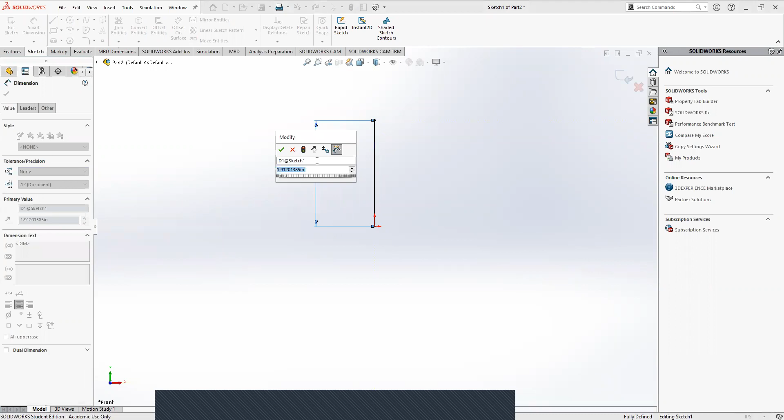I'm going to show you basically how to make a sphere first, with the revolve extrude. So what you could do is just make our line here. We can just make this like a 2-inch line. It doesn't really matter too much here because we're just making a ball. Once we do that, we'll go to our center point arc. That should be the default, unless you've changed it.

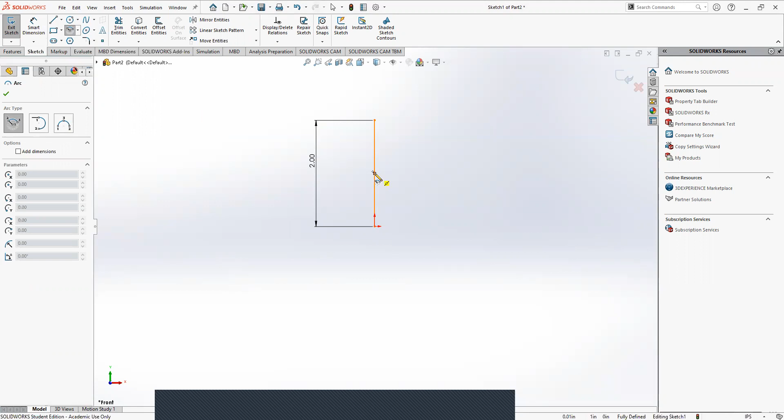But you should just go to center point arc, and then your first click is going to be the center point of it. So we're going to click on the middle point of the line. It should kind of make itself pop out. So from there, we'll click on the midpoint, then we'll click on one end of the line, and then we'll click on the other end of the line. And that should give us like a semicircle.

Yeah, I got that. Cool. And it should be fully defined right off the bat. Not quite, it's not for me. Not sure why though. Try, so see these points on the top and bottom. When I did it, I clicked them both, yeah. Okay. So grab the actual arc of it and try dragging it back and forth and seeing what moves. Oh, it turned black.

Oh, I guess it did? Okay, cool. Then you're good. Awesome. Sometimes that'll happen, it's a little weird. I think it's just because you had it selected, it was still blue. Yeah, that might have been it. Cool. All right, nice.

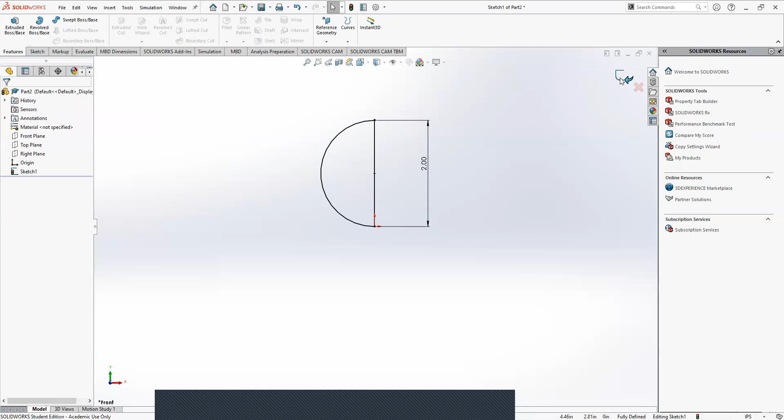All right, so now we're just going to exit the sketch, or we don't have to, I guess. We can stay in the sketch and go to features. You can do this outside of the sketch as well, it doesn't matter too much. You just click revolved boss/base, and the first thing it's going to ask for is an axis of revolution. That's basically what line we want to do this revolve around. In our case, we're going to click the center line because we want to revolve this half circle around, and that's going to make a sphere.

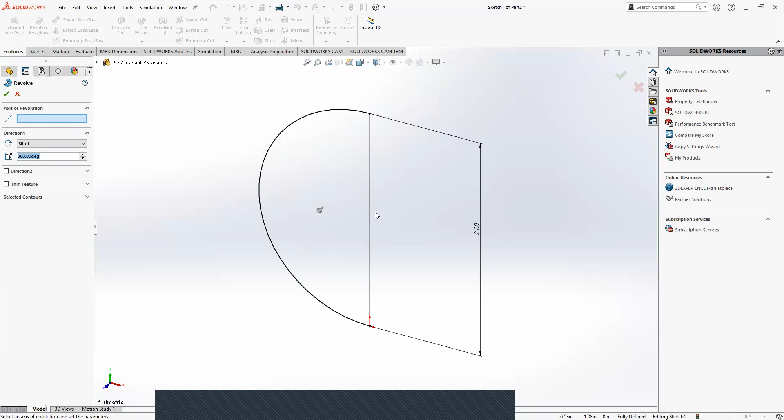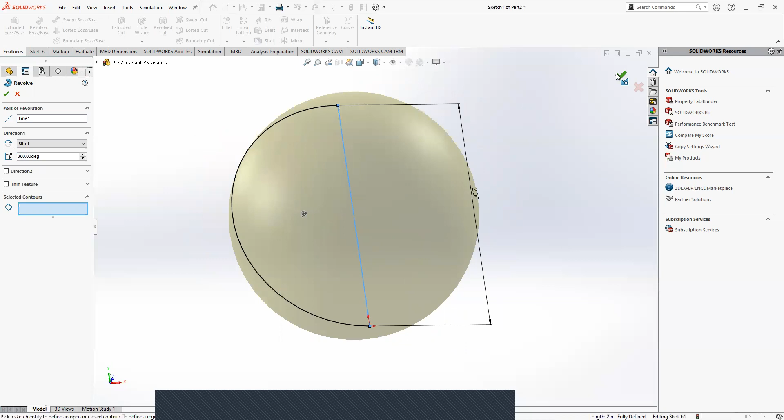So I can click that, and kind of like how we were doing the boss extrudes, where it would occasionally automatically know what we wanted to extrude, here it automatically knew what we wanted to revolve. I just had to click the axis. If I hit check, I have a ball now. And that's how you can make a sphere in SolidWorks. Yeah.

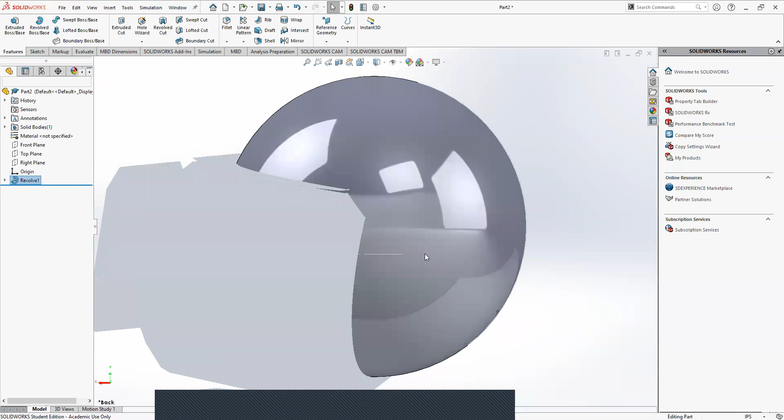Let's see, what else do we want to do? So let's say we wanted to cut just a little square groove that went all the way around the sphere, right? I'm just going to show one quick way you could do that. For some reason, my viewing is being really weird right now. You can see all those gray boxes. So what we're going to do, let's start a new sketch.

And for our plane, we're going to select the top plane, in this case. Really, whatever plane you're facing, depending on how you're oriented. You can actually pick any of these planes. So just pick a plane that you're going to sketch on. Okay, hold on.

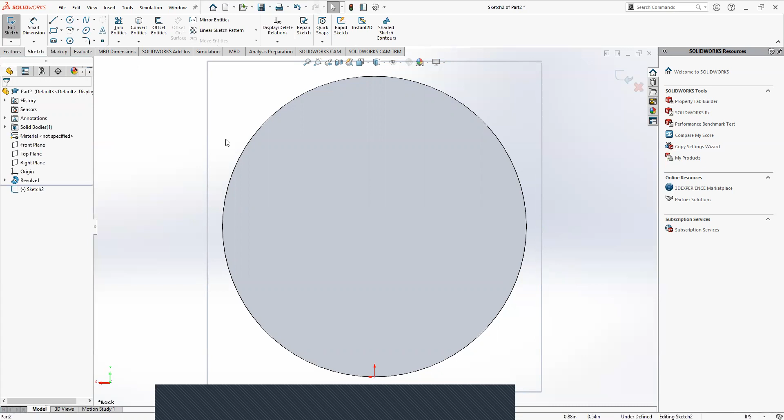Hold on, I think I'm going to just save this real quick and close out because it's being really weird with the views. It keeps throwing gray boxes at me. So I'm just going to close out of that and reopen it.

All right, so start a sketch. You can pick any plane because obviously it's a sphere, so no matter what direction you're looking at it, it's all going to be the same. What we're going to do is make a little square notch, basically, with some straight lines. See how if you're on the border of the sphere, it kind of glows as a circle almost. For our lines, we're going to have our first point touching that.

We're going to come off with a horizontal line and do a quick vertical one. And then we'll do our last one, making sure we're ending it back on the edge of the sphere.

And that's just going to make sure that it's well on the edge. That way we're not cutting inwards or our cut's going too far out. This way it's kind of right on the edge of the sphere. Is it okay if it's a little bit slanted, like the rectangle lines on there? Like, the lines are parallel, but the thing itself is slanted. That's fine, right? Yeah, click on the line.

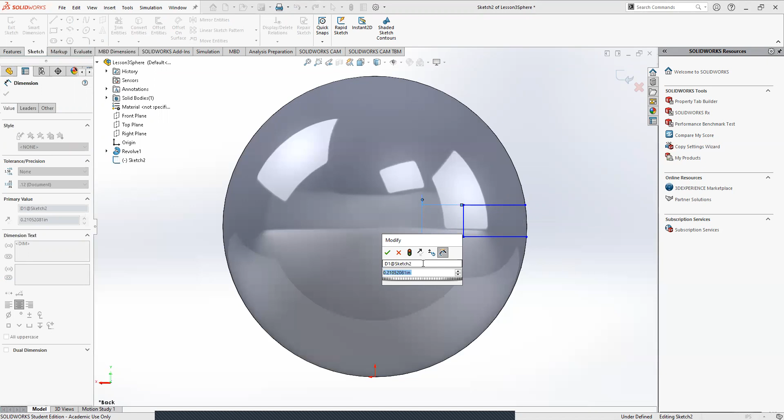So we're gonna decide how thick we want this cut to be. Because this is a 2-inch diameter sphere, maybe I want it to be 0.25. That sounds fair. And now one thing to notice, we haven't defined the length of these lines at all. So let's do that real quick. Or well, first, one thing that's kind of weird: I can move this cut up and down on the sphere.

So let's do something about that. I want this to be perfectly centered. Do you have any ideas on how I can make sure that this cut's going to be perfectly centered? By that I mean basically right on this line here instead of being all the way up. I'm not too sure. All right, well, there's a couple. I'll show a couple.

The first one we can do is if we make both of these lines equal, right? Notice how if I move it farther up on the sphere, this line gets shorter than this one. And if I move it down on the sphere, this line gets shorter than the other one. The only time the lines will be equal is if it's kind of centered on it.

So if we set them both to equal, you can see it shifts it down. And now we can't move it up or down anymore because this is the only area where the two lines will be equal length. So that's one thing you can do. I'm going to get rid of that though. Here's another thing you can do.

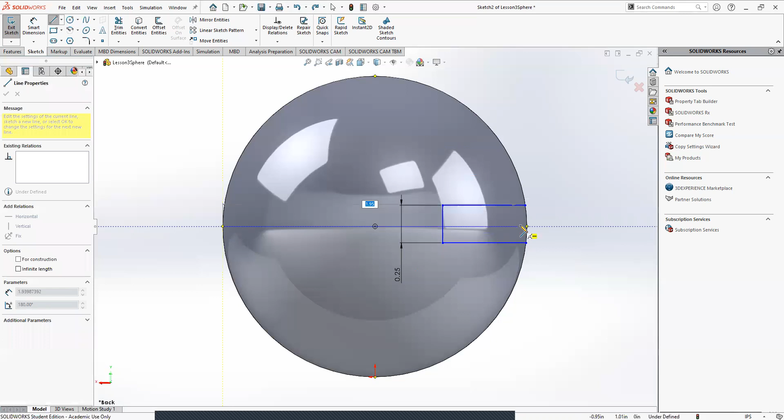If I make a line to show a midline of the sphere, if I click on the line option, I see these 4 points pop up on the sphere: 1, 2, 3, 4, all on the edge. If I click on the 2 points that are horizontal from each other, then I'll make this line a construction line by clicking on it and clicking this construction box. Oh, that didn't work.

That's okay. I could make that work, but that's gonna be a little difficult. So let's just stick with the equal relation, or make the two lines equal. So now we can't move it up and down. And then we just need to say how long we want these lines to be. How deep it is, we'll just say 0.5. Are you following along still? Yep, I'm good. I'm putting in the dimensions.

Oh, perfect. Ooh. Oh, issue? So I put in the 0.5, but then it moved it all the way to the top. Did you do the equal sign thing already? Yeah. It moved it all the way up to the top.

Try getting rid of that. Oh wait, hold on. I'm gonna get rid of it. You're gonna get rid of the 0.5? That's probably a good idea. Yeah, that's weird. Even though I did the equal thing, it doesn't stay in the middle. It just makes the lines equal. It just made these equal. Yeah, it just makes the lines equal.

I see. Did you make sure that these two lines are both horizontal and that this one's vertical? If you want, you could just add those relations now. Hold on. Make those two horizontal and then this one here vertical. That might help. Oh, now it's stuck. I had to make that line vertical. Now it's good? Okay, yeah, perfect. All right, nice. Glad that worked out.

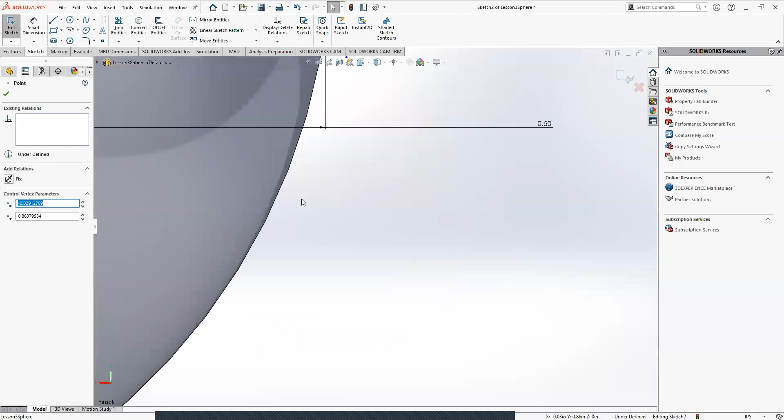Sometimes in SolidWorks it's hard to select stuff, so try zooming in a little bit on the edge of the circle with the mouse wheel after you click the point. Now hold shift and try clicking the edge. Oh, I messed it up. You want to click just outside the circle and it should work. Oh yeah, I got it. And you have the point and the edge selected? Silhouette edge, yeah. Perfect. So now try clicking concentric.

Concentric basically means having two things centered within each other, so it's going to put the point in the center of that circle. There we go. I love concentric, it's really useful, and later when we talk about assemblies it's super useful there too. So now if we go back to our arc, it's really in line with the circle. Now we just need to drag this point down to that point to close our little box.

Back down to the bottom line? Yeah, because remember how we already set one point to the top. Now just set the other point to the bottom. Okay, and I will say all of that was to a degree show off the coincident or concentric thing.

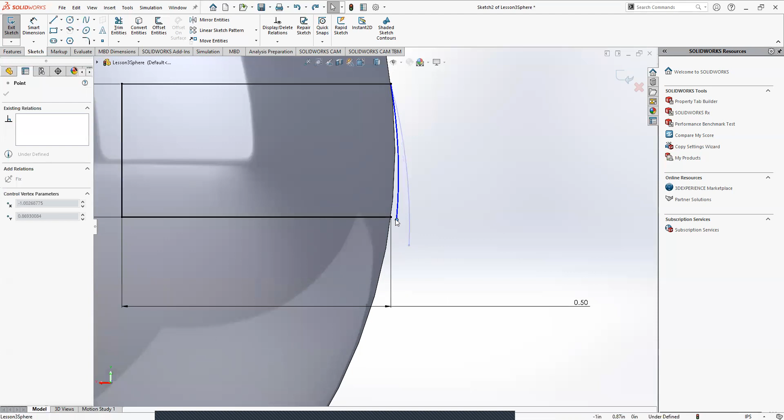The other thing we could have done is right from the start, grab that point and stick it on that one, but then we still would have had to define the center. Yeah, I guess there was no other way.

All right, so let's exit our sketch now. You can use either this button here or this button up top. Just don't click that red X because that'll get rid of everything we did.

Oh, I left that underdefined. Can't let that. We have to define it first, right? Yeah, I deleted my concentric relation, so mine's fully defined.

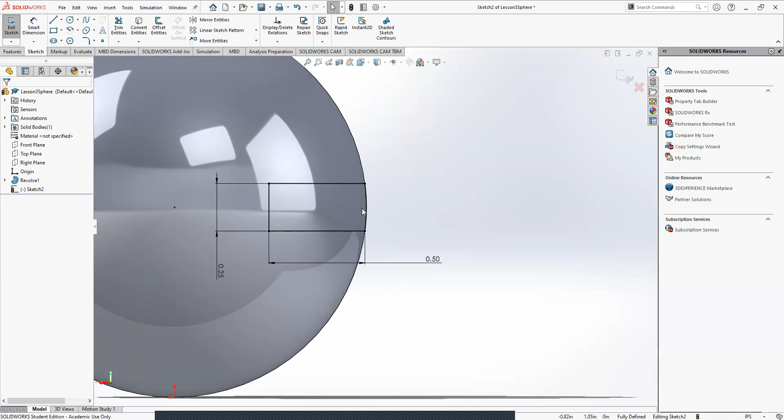Do you have any blue lines still? Yeah. Oh, you do? Oh no. Hold on, which ones are blue? We got to fix that. Wait, that was weird. It might have just been because you had it selected before. That might have been it. All right, cool, I don't know.

It's like gray now. Yeah, that's good. Whenever you have a sketch that you didn't do anything with, it's gray.

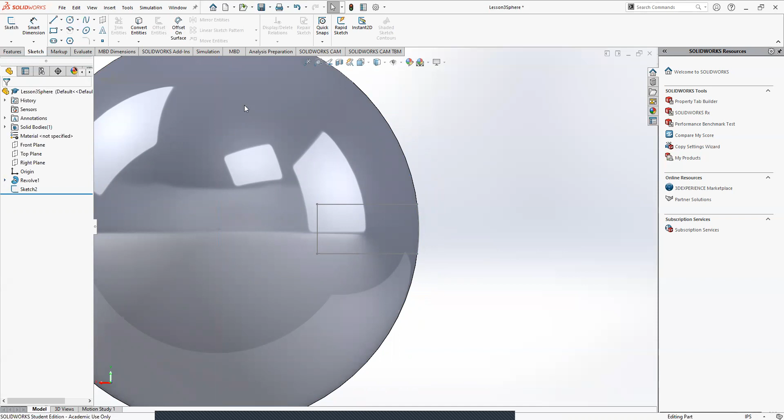Remember our original sketch that we used to make this sphere? SolidWorks doesn't show it anymore because it's like, well, you already used it, right? Almost. If we want, we can click this drop down menu and still use the sketch for other things.

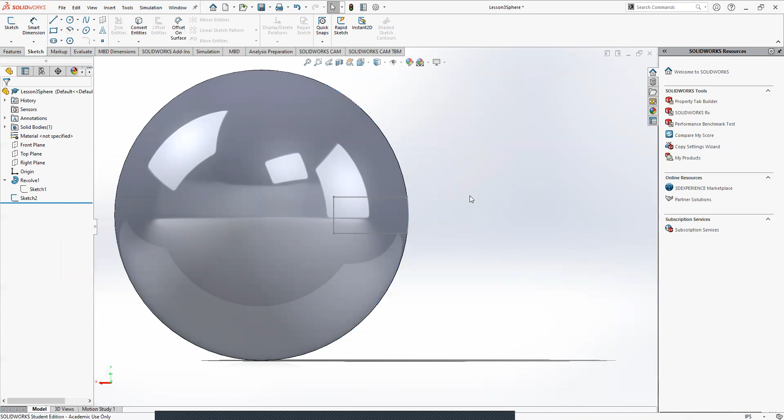And we can even see it, there's the sketch we made. But unless we actively try to look at it... the other thing you can do, if you want, is right click on that sketch and hit show, and you can see the gray lines of the sketch. SolidWorks just hides it for us because they're like, oh well, they're done with it. Yeah, because we already did something with it. Exactly. So SolidWorks tries its best to help us out, but sometimes it doesn't.

All right, one thing I want to see, I'm not sure if this will work. I should have tried it beforehand. Can I do that? No.

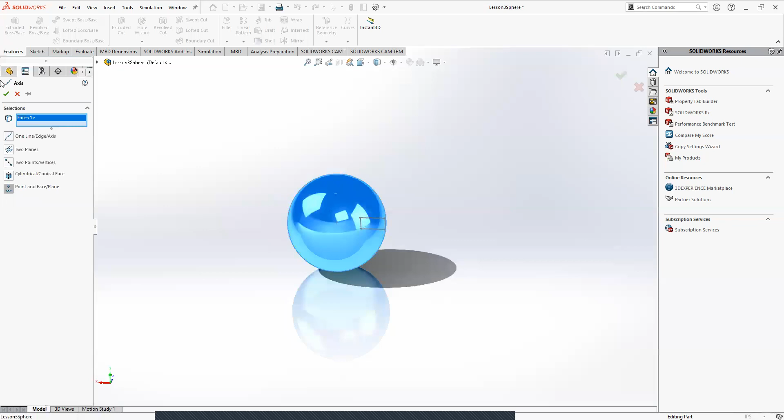Okay, so let's go back into our sketch, because we're going to do the line in the sketch. I was originally hoping to be able to do the line to the sketch with the boxes thing, the one we just did. I was hoping to try to sneak some reference geometry into here, but I don't think we can do it with this specific shape. So we'll finish this one up and then do a different shape and play around with it there.

So let's add a line now. We're going to click on and add another line, click on this top point of the sphere that kind of highlights itself, go all the way to the bottom, and then click there. You'll see that define itself.

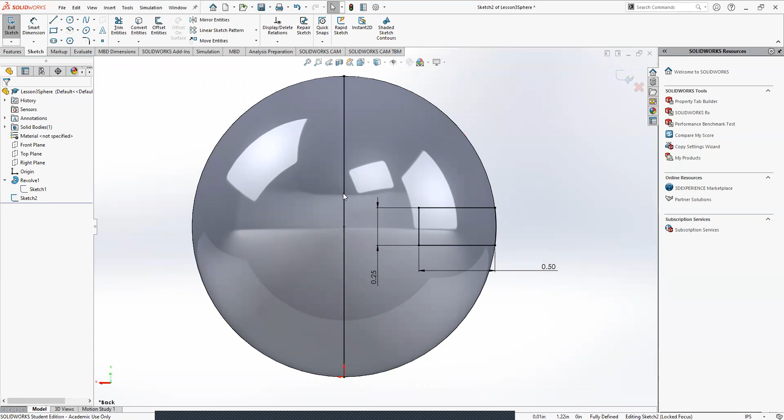Cool, that's nice. We're just going to click for construction. If you click on the line, there should be a little checkbox that just says for construction, underneath the relations.

Oh, for construction, my fault. It'll just turn it into a dotted line, and since it's not part of the shape we're trying to make or the cut we're trying to do, it's more just there to help us with everything else. Nothing bad would happen if we didn't make it construction, but it's usually nice to do. It'll make your life easier later on.

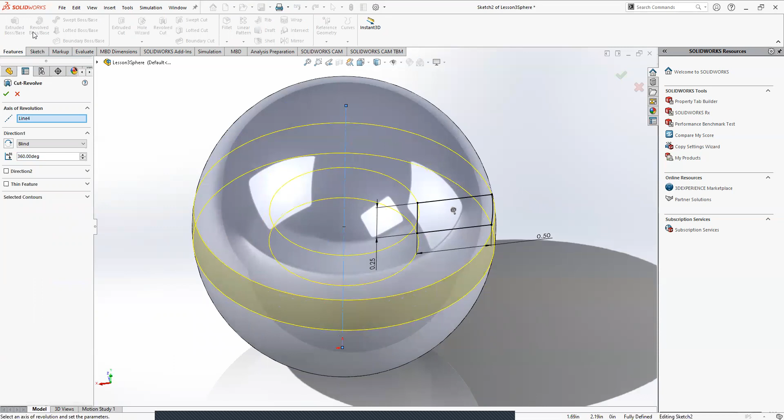So now we're going to go over into features and click on revolved cut. It works the exact same way revolved boss base works. Basically what you do is select your axis; in this case it automatically selected the line for me. Then you have to select your contours, but it already selected the box for me automatically, so I'm all good, I can just hit check. Now we have a sphere with a square cutout.

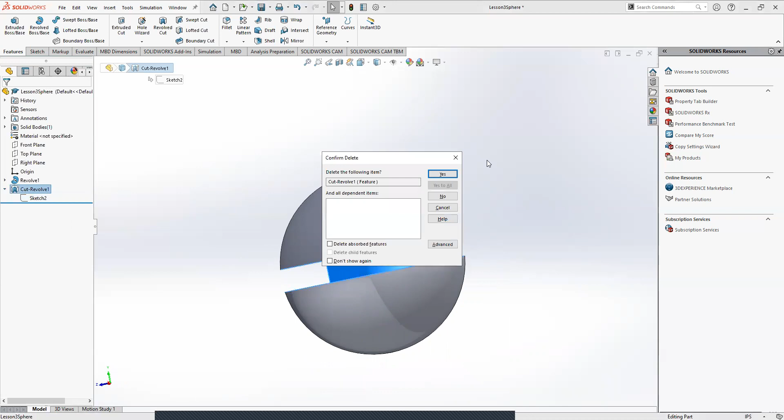Wait, are you supposed to click the box or the dot in the middle? Sorry, here, let me delete this. So are you in this sketch or out of this sketch doing this? I'm in the sketch, and then you click on features, and then go to revolve cut. For the axis of revolution, you click on that construction line we made. Did you do that?

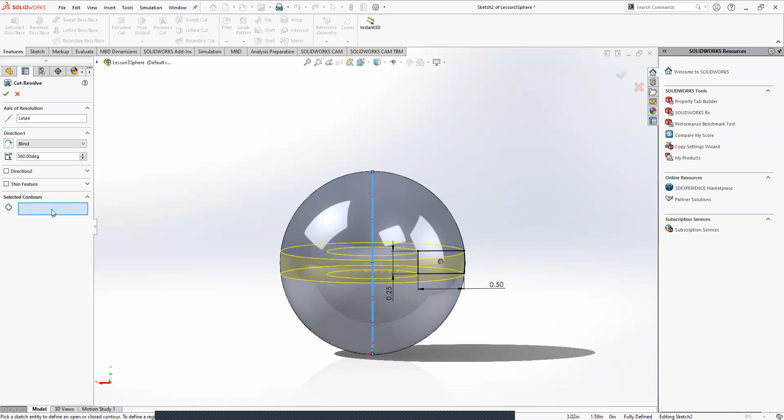Okay, so now go down to selected contours. That's where we're selecting what we're trying to cut out. In this case, it's our end box. So you would click selected contours and then we would click our box, and then click check.

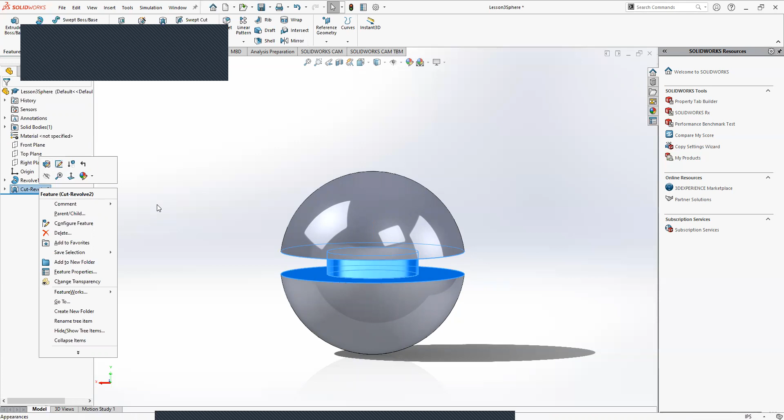Did it work? There's a lot going on. Yeah, awesome, perfect. This is bodies to keep though. Um, wait, I don't think it worked actually. I think it got messed up because of this. Wait, hold on.

So you know how yours has just a line, just like a cut straight through the middle? I'm not quite sure how I did this, but you know where the cut was before, the little box? There's like stuff there, and then there's a cut, and then there's not, like there's three chunks. I don't know.

Let's try this. I'm going to stop my share and give you screen sharing privileges, and I'm just going to see if you can... I'm on my phone, so... you can try. Oh, right, yeah.

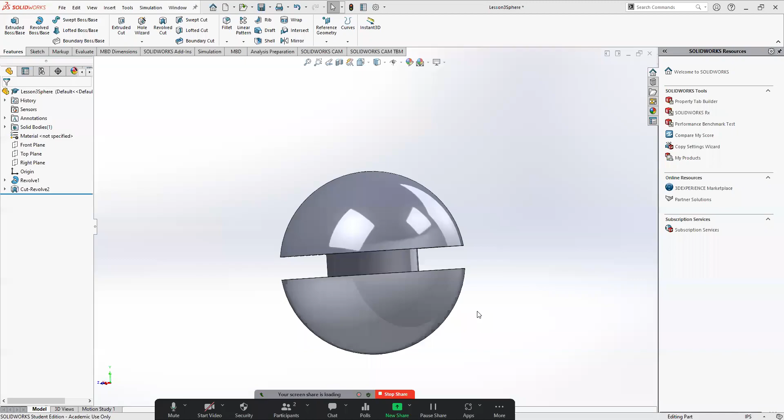Is there any chance you could just take a picture of your laptop screen and send it to me in Slack? Yeah, I can take a picture. Cool, that's probably the easiest way to look into this.

Yeah, I wish we could do these in person because it's a lot easier to show it that way, but I'm pretty far right now. I thought the lessons were going to be in person at first, that's what my hope was. I had wanted to do these last winter or last summer, because I was in Connecticut, but right now I'm in Massachusetts for work, so I can't really come down to teach them.

Okay, I sent the picture. It's sending right now. Gotcha, cool.

I don't even know how I got there. Now that's interesting. Huh, I'm a little confused. Does your sketch look the same as mine? The sketch, I mean, yeah, it looked exactly the same, nothing was different. You just have this little button.

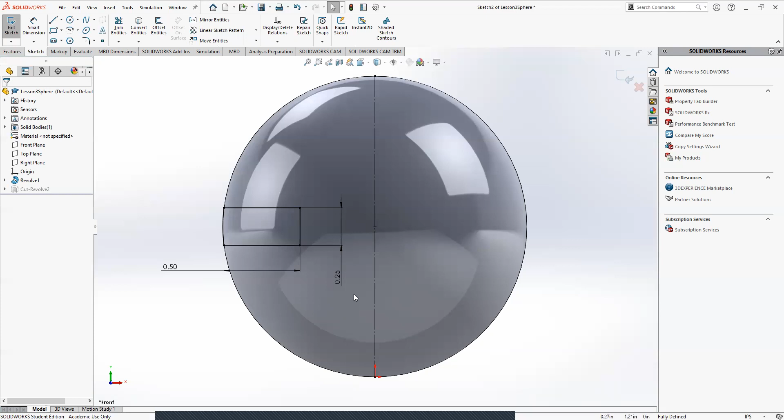Oh, I know what happened. Okay, hold on, I think I know. So if I go into... okay, so we're gonna go back. Can I delete this cut here? Yeah, go ahead and delete it. Okay, yeah, all right.

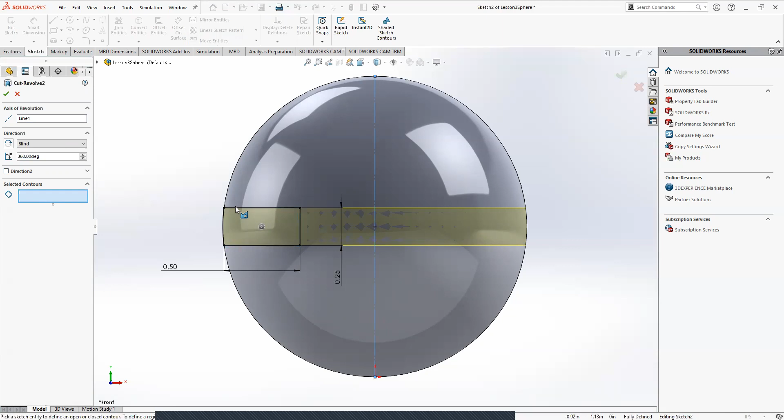So there's this thing now in SolidWorks called a thin feature, and I think you accidentally did that. It's probably just because of that. The thin feature is kind of weird. I'll give you a quick demonstration of what that does - do you have all these lines here and everything's fully defined? Yes.

Oh yeah, no, I accidentally moved it, so the sphere went crazy. Anyways, I got it. Well, here's what a thin feature would look like. So let's say I deleted this arc and tried doing a revolved cut.

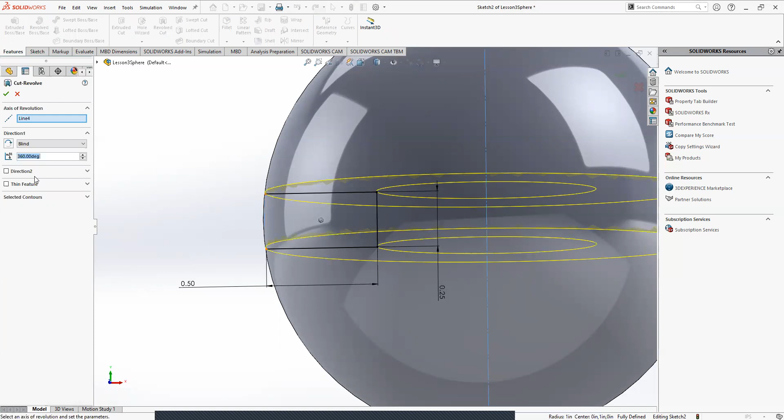Thin feature. I think that'll do it. The only thing different that I noticed was that when I did that, the yellow lines did not come up. Gotcha, yellow lines? Yeah, the yellow lines when you were cutting it. Yeah, that's usually if you don't see that, it usually means there's something wrong with it.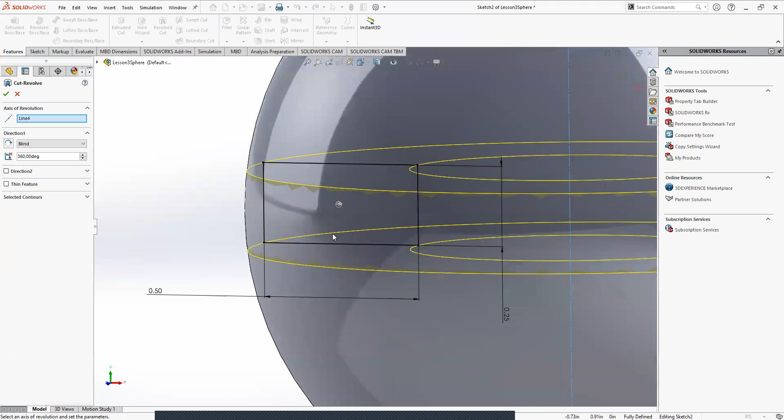Unfortunately not, but you were saying you have... oh, that's interesting. So do we stay in the sketch during this, or do we exit it? So I am curious, you're saying your sketch looks the same as mine, right? Yeah, I'm kind of stumped.

Try deleting the arc that we made, and we're gonna do a new one. So we'll place the center. Now that we drew this line here, we won't need to do the concentric relation because we can place the center.

Do you want me to just try doing it again, like maybe it just messed up or something, the feature? Yeah, go for it, you could try redoing the feature. So do I exit the sketch or do I stay in it? It doesn't matter - if you exit the sketch, just select it in the feature tree and then click it up in the feature menu, or you can do it in the sketch. You can really do it either way in SolidWorks, and it shouldn't make a difference.

It did it again. Did it which again? That's strange. Try going into the sketch and let's remake that arc we did, because I have a feeling that might be where your issue is. I could be totally wrong, I'm just guessing here. Oh boy, I don't know what's happening.

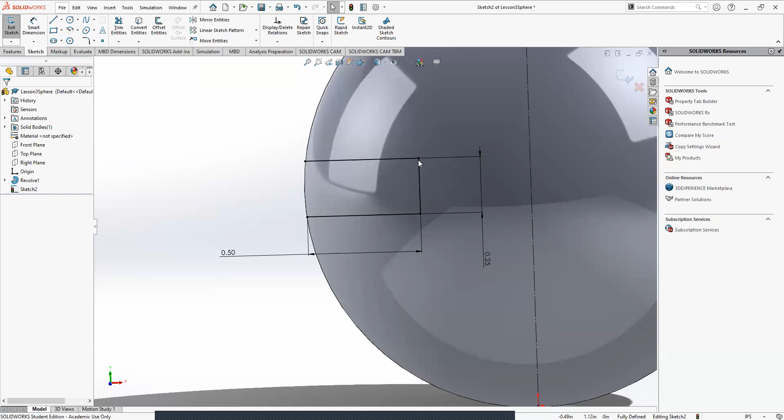Errors in your sketch now? You know what, it wasn't an error in my sketch. I was still trying to do the revolve cut thing, but I don't know what happened there. There was like the yellow things moving. It finally came, but then the yellow things were moving around, and I'm not sure what was happening there.

Could you try going into the sketch so you can edit it? Yeah, I'm in the sketch. So let's delete that arc we made that was kind of capping our box. And we're gonna make a new center point arc. This one will be easier to make because we can use the midpoint of the line as our center point instead of having to do the whole concentric thing.

Like that, then we'll click here. And then, oh, hold on. Yep, center point, and one point, and then the other one. There we go. One thing that can happen when you're doing arcs is sometimes it'll go in the opposite direction from what you want.

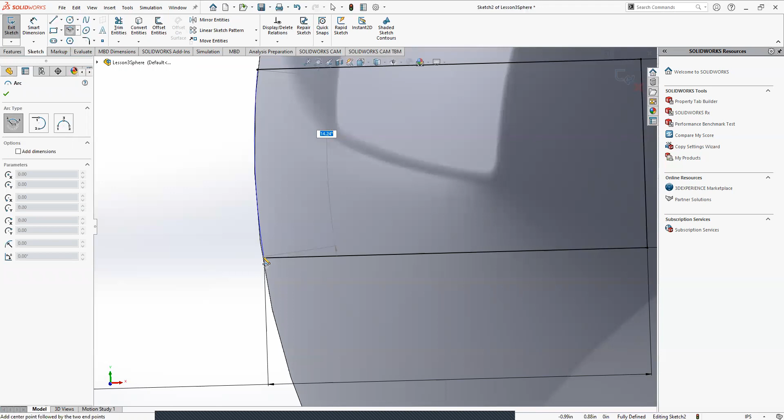So if I go here, see how it wants to draw it - see how it can go the long way or the short way? Yeah, it was the right way. That's pretty lucky. I think there's a way to control which way it goes when you start it, but I haven't figured that out yet. So if it ever goes the wrong way, you can just kind of trace it back and do it backwards almost. Definitely not the easiest way to do it.

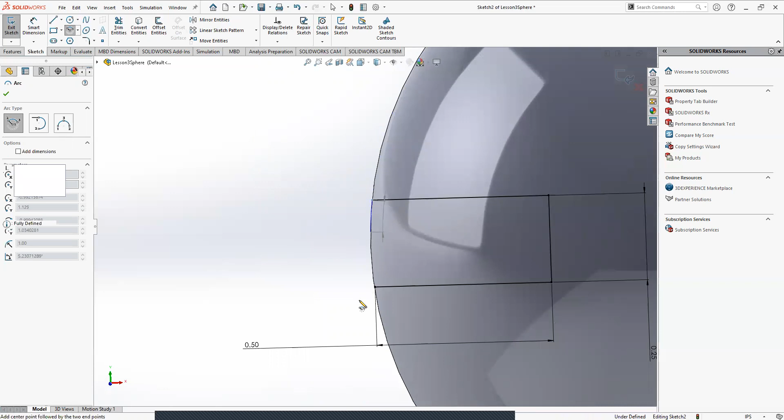So we'll make our arc, make sure it starts at one point, ends at the other, and it should be fully defined. All right, now let's try doing our cut again. We'll go to revolve cut. And you click the middle of the line there. Yeah, you click the line - the construction line. So you just click that line, right?

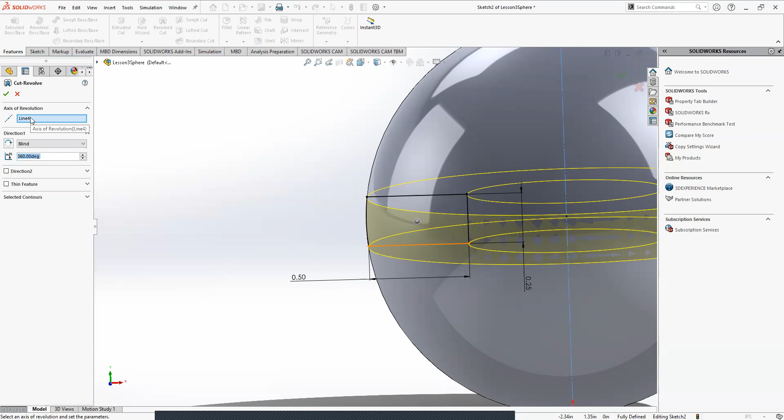That's it? I didn't have to click anything, it auto selected everything for me. Okay, then I click the box there, right? Yep. Okay, then I click.

That's so weird, it says it can't do it now. I don't know what's happening. Come on, I'll try one more time. I'm gonna keep giving it an effort. Or we could also move on and just do the other things real quick, and then we can come back to this and try to fix it.

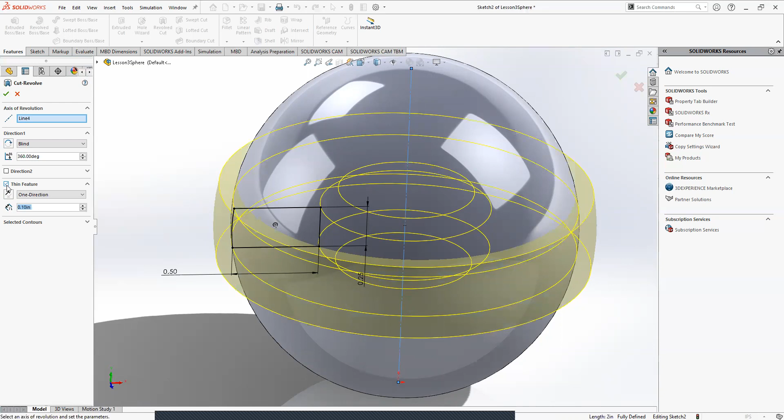What's that? It says thin features on. Try, so if it says thin feature, can you just uncheck it? Oh, that's what the problem was. Oh my God, I never clicked that though. I don't know, that's so weird. Sometimes it'll automatically select it.

Are we all set though? Yeah, let me try this one more time. This is a great example of how annoying thin feature is. Yeah, this is fun. Because if you do thin feature, it comes out exactly... it throws a bunch of issues.

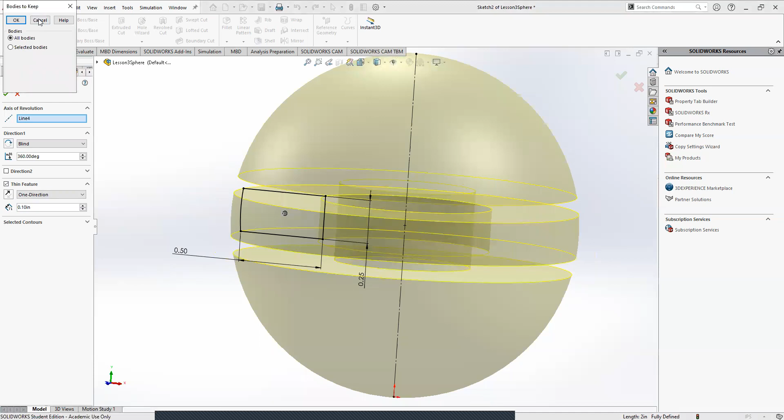Okay, well now it won't let me do it because the sketch is open apparently. So I'm gonna try it one more time - gonna get out of the sketch. If your sketch is open, that means one of your points isn't touching another. Basically, that box you made, that means there's some points that aren't connected, so it's not like a closed box, it's more of an open one. So you may want to double check your arc real quick to make sure both points are touching the lines.

It keeps auto selecting thin feature. Yeah, usually that's because you have an open sketch when it does that. Okay, open. So let me go back to the sketch then. How would I know what it is? Try zooming in on the box. I'm not even sure. Oh, there's a point there. I don't even know how I got that.

That must be the secret line. There was a secret line that I did not see. Yeah, there was a secret line. Okay. Now it should be fine. Let's see. We'll see how it goes. Fingers crossed.

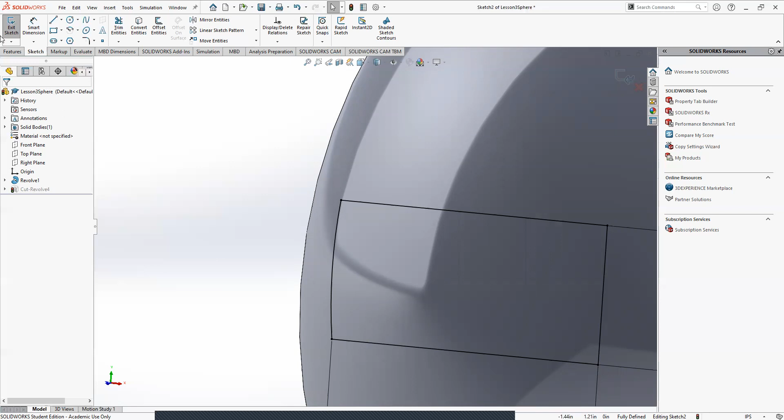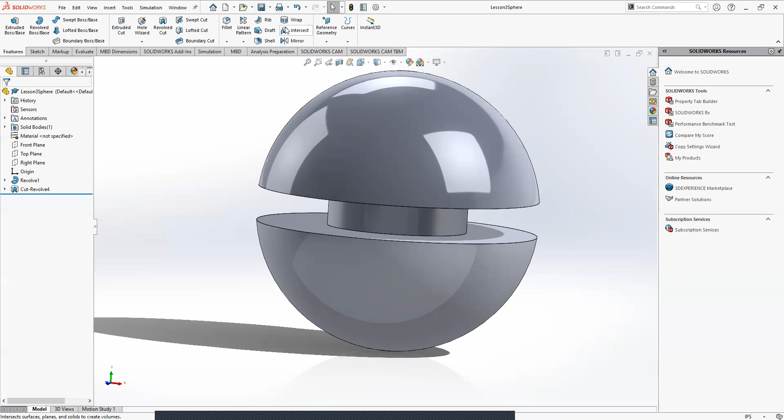Awesome. Usually when you have a thin feature come up or it says something about an open sketch, 90% of the time that just means you drew two lines and it looked like the points were connected and the lines were touching, but they weren't quite. And it can be very hard to spot. So I'm just going to save this. Feel free to save this, and then we're going to start a new part. Just let me know when you saved it and you're ready to start a new one.

I'm so glad that was over. That can happen too, where something just isn't working and it takes a while to figure out what. That's why I was mentioning with the relations to really be careful about which ones you use. Sometimes you can get into a situation where you added the wrong ones or too many. Then you change a dimension, everything breaks, and you have to figure out what's wrong and start deleting and remaking everything. Yeah, it can be a little frustrating sometimes.

Okay, so what do you want me to do now that I saved it? Just open up a new part and you can close out of that one. In SolidWorks, there's almost two X's. There's this big one up in the top corner that closes the whole program. Don't do that one. There's a tiny one here that lets you close out of the specific part you're in. Oh, okay. So you can close out of a file without closing out of the program, which is really useful.

And if you have multiple files open and you want to change between them, go to the SolidWorks icon down on your toolbar and click on it. It'll bring up the different files you have open. You can see my sphere file is still open, kind of like different windows for a browser. So you can just close it, and since I saved it, it's fine. But if I hadn't saved it, it'll give me a little warning to save it. All right, so let's start a sketch.

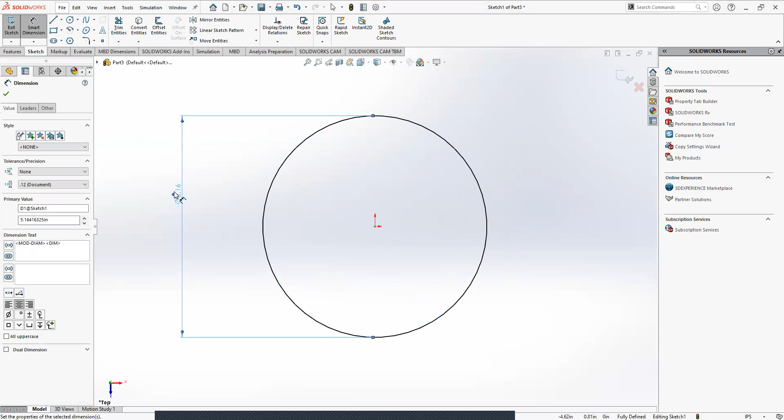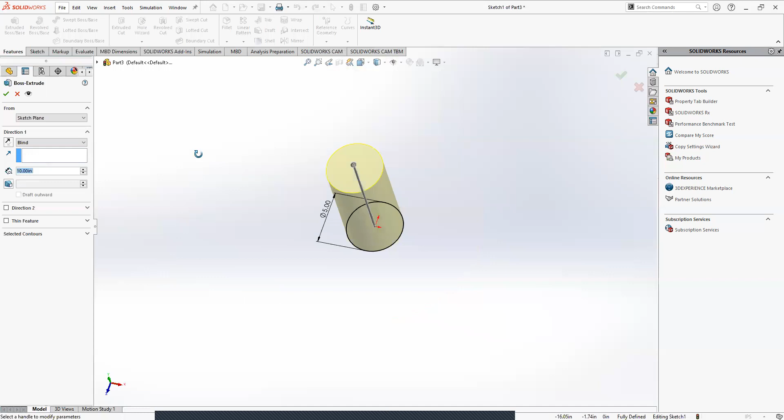Nope. You got the circle? Yep. Cool. So let's go to features. We'll do an extrude, and we'll extrude it, say, 10 inches. There we go. Hit check. Now we have a nice cylinder.

So with this one, I'm going to talk a little bit about how to use reference geometry, which is pretty useful. So let me know when you're ready. You have a cylinder, right? Yeah. Perfect. So in reference geometry, there's a bunch of different stuff. The main ones we'll end up using.

Oh, is that like a thing I'm supposed to click? What do you mean? Oh yeah, if you go into features, you'll see reference geometry. Oh, I see it now. Yeah, sorry. And you can either do plane, axis, or a bunch of these other things. I'll be honest, I've only ever used plane and axis. They're very useful, and I'm sure these ones are useful as well. I've never had to use them before though. But we'll be talking a little bit about plane and axis right now.

So first, let's try making an axis, right? So we'll do the drop down for reference geometry and click on axis. And you'll see it gives us a bunch of different ways to make a line, right? So we can click an already existing line and it'll just basically add another line there, and that's our reference geometry. That's one thing we can do. We can click on two planes, and when two planes intersect, they form a line, and it'll basically make a line at that point.

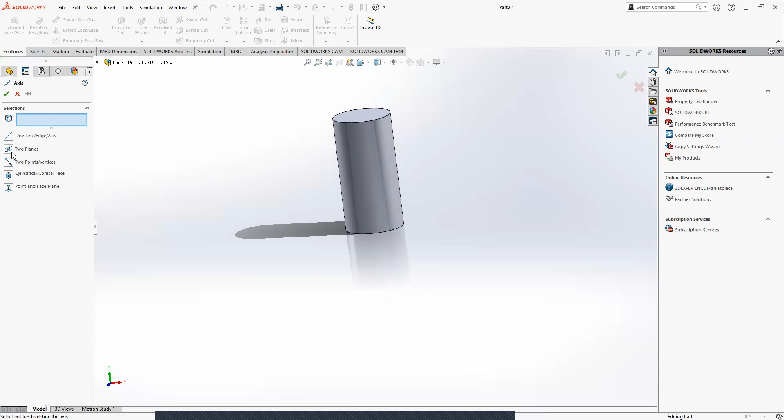That's kind of like some math stuff, some pretty fancy geometry, and there are some things in SolidWorks that I think you can get more use out of the better you are at geometry. But this is one of those cases where if you have two planes that intersect, they're going to intersect at a line. Another thing you can do is if you just click on 2 points, it'll make the line between them. This is the one we're going to use, cylindrical or conical face.

Basically, if you click on a cylindrical face, which would basically be this face here, so it goes around a cylinder. The one that goes around. Yep. Okay. What that's going to do is it's just going to make a center line. So a line basically just popping out of the center. There we go. And then finally, you could do a point and plane or a point and face.

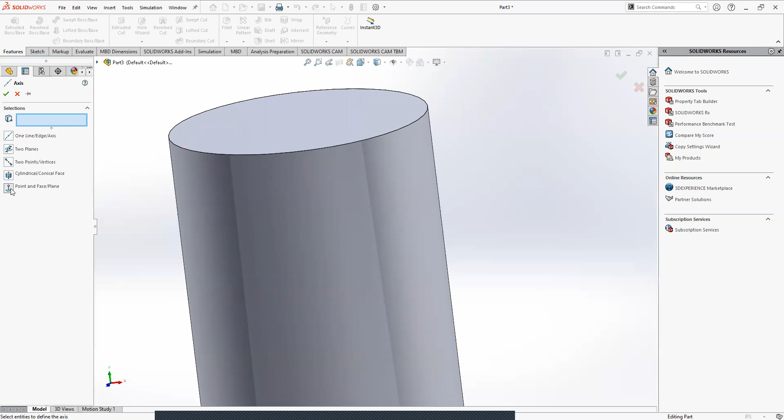So let's say I had a point somewhere up here. I could put this point in this face, and it would basically just draw a line going from the point down to the face, and the line would be perpendicular to this face. So basically go straight up out of the face and hit the point. So those are a couple different ways to do an axis for reference geometry.

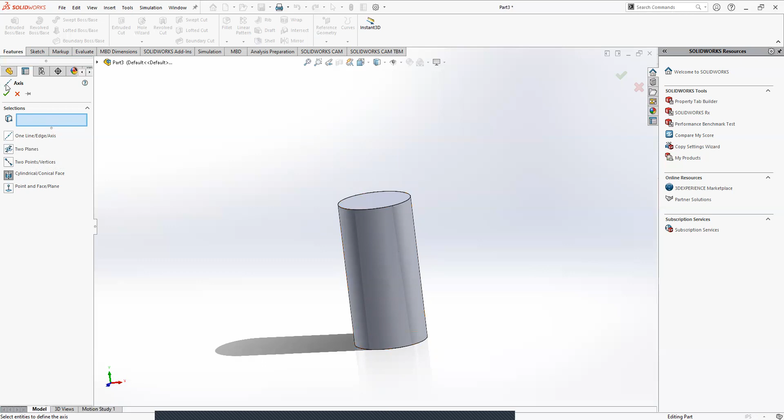I've mainly used them with just cylindrical faces. I've also used it occasionally with the line edge axis and the point and face one, but this is probably the most common one that I use. And it's the one we'll use here, but it's kind of just important to know how to use it. So let's just click our cylindrical face, and you can kind of see it gives us a little preview of what the line's going to look like. So we'll hit check, and boom, now we have an axis, and it shows up here under the feature menu.

It's supposed to be blue, just to make sure? Yes, that is a good question. The reason why it's blue is because we could still move it up and down, but it doesn't really matter in this case. Okay.

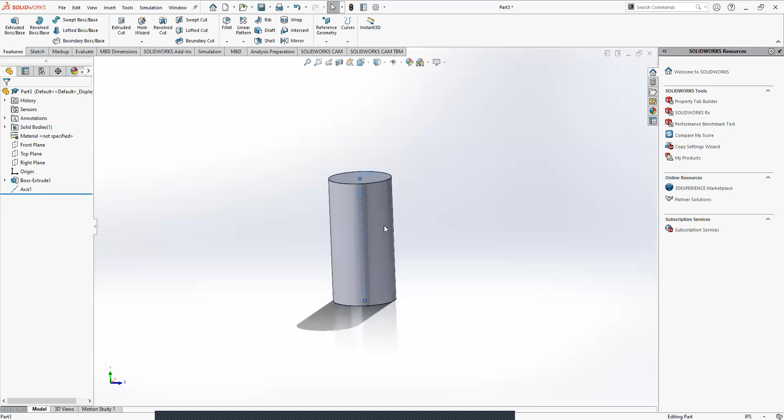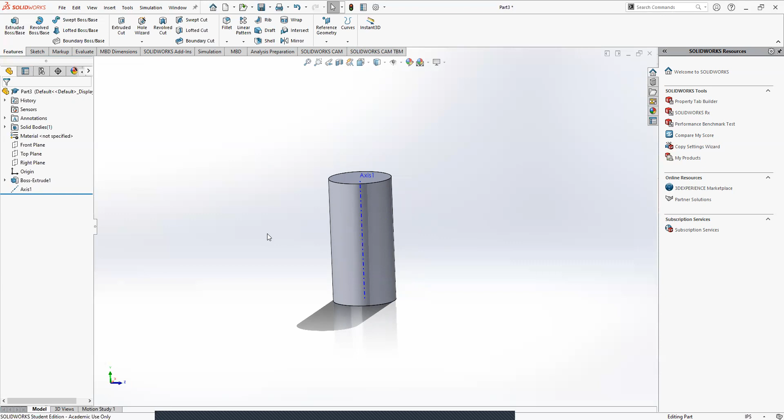So what's kind of cool about these is remember how in our last one we drew that line in our sketch to revolve around? Remember when we were doing the box cut? Like the little box, last time? Yeah, the last file we just finished. Oh yeah. And we kind of had to make the line in our sketch, and that was the line we revolved around. Well, now we can use this axis to do the same thing.

So let's try making a sketch. So let's do a sketch, and with the little feature drop down, we'll select the right plane in this case. So right. Yep. Let me know when you're ready.

All right, cool. And this is going to be a way easier one to make because we don't have to worry about that arc. We'll just select the corner rectangle, and we'll click the first point to be on kind of like the line here, this up and down line that makes up this cylinder. Wait, it's not. Okay, hold on. It doesn't say it's clicking on this. Oh, it doesn't highlight or anything?

No, you know how you go on the sketch and you have to pick a side? It's like stuck. It's not going into it. Here, can you look at my screen real quick? So once you do your first sketch, it doesn't do the pop-up of all our planes anymore. Because SolidWorks kind of assumes that the rest of the sketches we'll do are going to be based off of this part here.

So if you still want to draw on one of the old planes, you have to go to this little drop down, and then we'll click. Oh, so are we not doing a new one? Are we doing an old one? We are doing a new sketch. But once you hit new sketch, you can just click right plane. The other thing you can do is in our feature tree, you'll see that right plane is still there. We can click right plane there and then click sketch. So whatever's easiest for you, whatever makes the most sense.

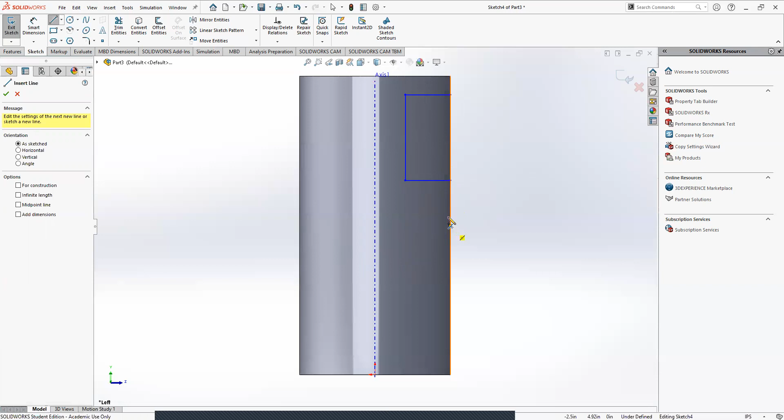So what we can do is let's click the line option. I'm going to move this rectangle all the way up here. So just grab the bottom line and drag it all the way up close to the top of the cylinder like this, to get it out of the way. Now we're going to select a line. If we go on one of the edges of the cylinder, you'll see the little center point highlight itself. We're going to click on that.

Other side of the line will go to the center point on the other side. We're going to click it, and we should get a fully defined line. We're going to make it into a construction line. Okay, perfect. Awesome. So now what we can do is if we can find the midpoint of this line, or let's do this instead. Let's click on the construction line we just made. Point's not showing up. All right, never mind.

Let's click on the point. See, I can make a point here. We're gonna do that, and we're gonna go over to the line on our rectangle that we've sketched so far, and we'll put it on the midpoint. Because if the midpoint doesn't pop up when you want it to, you can just place a point on the midpoint, and then you'll always have something you can grab onto. So we'll click that little midpoint point, and then shift click our construction line.

And this point. So you click the point and then you shift click on the construction line and then... Oh, midpoint, I assume, right? Not quite right. You'd think. Yeah, midpoint makes sense because it's mid. What midpoint would do is it would take this point and make it the middle point of this line here. So basically take this point and put it here at the middle, which isn't quite what we want, because then if we tried to revolve cut it, we would basically cut all the way through our cylinder because it's going to the center, right?

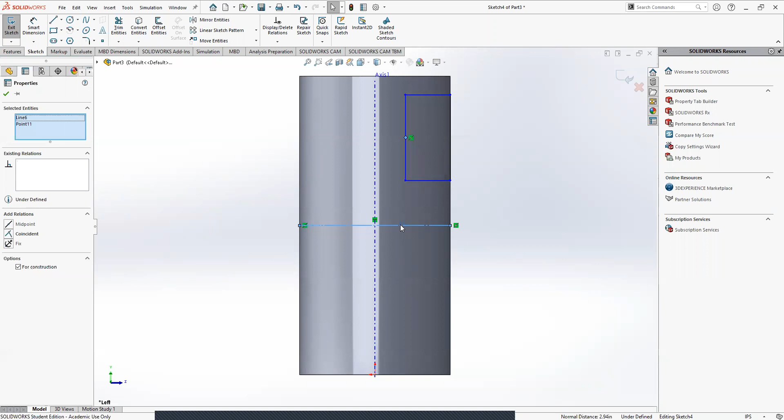What we want to click is coincident. That's going to make the midpoint of this line be on this line. And if we click it, you'll kind of see what happens. Yeah, it just auto adjusts itself. Auto adjusts itself, and look at it now. As I move these, it's always going to be centered, because the center of this line here is basically connected to the center of the cylinder. So now we just need to define these lines. Yep, now we just need to add some dimensions.

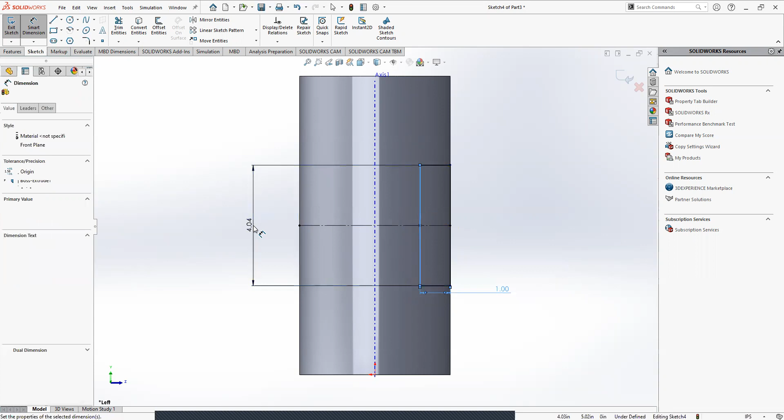And as you practice a bit, it can be a little unintuitive how to do some of this, like how do you center this on this and all that stuff. But when you practice more with relations and using construction lines, you'll get a better feel for it. So I'm gonna make it 1.5 inches deep. Oh, that just made it 1. That's fine. You can make these dimensions whatever you want. Make that 4. Yeah, I tried doing 1.5. My 5 key doesn't work very well. And then once we have that dimension, we're gonna just exit sketch.

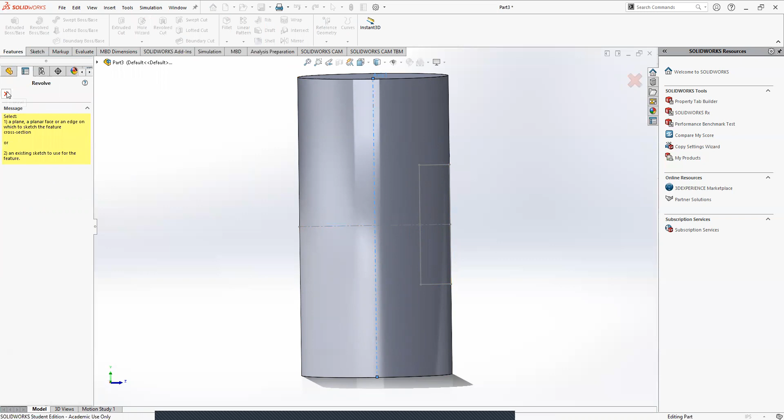Are you all set? Yep. Awesome. So now let's do this. We're gonna click our sketch in the feature tree. We're not gonna open it, we're just gonna click it so it's highlighted. Go over to revolved cut. Oh, I messed that up. Hold on. You want to select the axis that we made. I haven't done this in a while. So we're going to click the axis that we made with the reference geometry, and then click revolve cut. No, we did it right the first time. You have to click your sketch and then revolve cut. I'm sorry. Okay, it's fine.

The only thing is we're going to change our axis of revolution. So right now, see how it says line at sketch 4. I don't know which line that is, but that's not the one we want. So we're going to click it, hit delete, and we're going to click the axis we made instead. And now it works. There we go. Wait, hold on. Which axis did you click? Sorry, I was deleting the thing. No worries, that's kind of on me. I was rushing there.

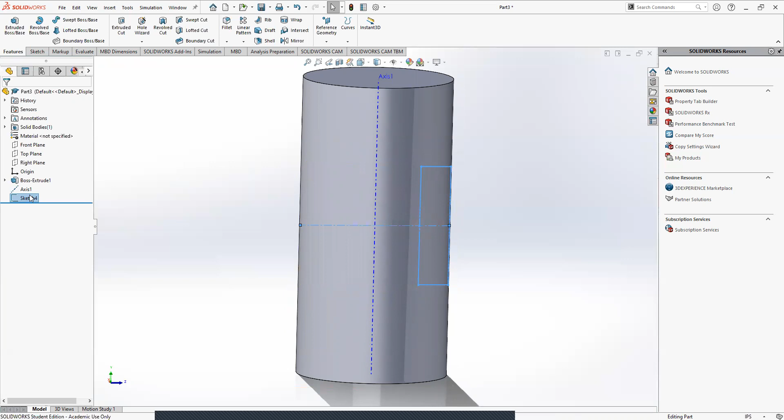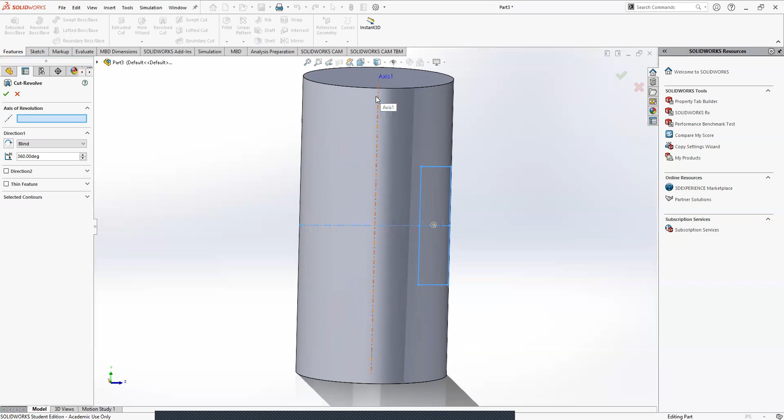So we click sketch, we hit revolved cut. Now, do you see how under axis of revolution it says line at sketch something? Yeah, I deleted that. We're going to delete that. Click it, hit delete. And then while that box is still highlighted, we're going to click on our axis, the one that we made with our reference geometry. Oh, and then it highlights it, and then you just press check. Yep, and it worked. So instead of having our line be in our sketch, we were able to have our line be outside of our sketch.

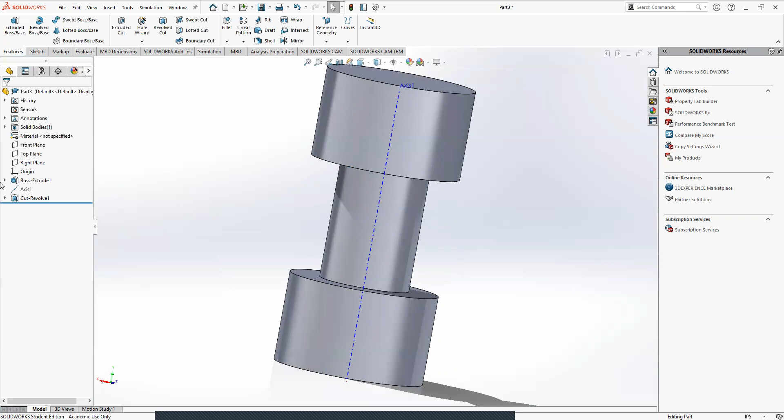And if you ever are using reference geometry, like we're done with this axis now, if we don't want to see it anymore, we can just right click on it and hit hide. If you right click on the feature, there should be an eyeball on it. Say hide. And you could right click on it again, click where that same eyeball was, and it should say show now. And it's the same thing with the sketches, right? Where we're able to right click it and show it or hide it. You can do that with anything, which is kind of fun. So yeah, there it is.

So if anyone's listening to the recording, save this because we'll use it in our next lesson, because I'm probably going to do planes on the next lesson. I was hoping to cover it in this one, but we're at 7:04, so I don't want it to run too far over. So we'll call it here. And yeah, there we go. All right.